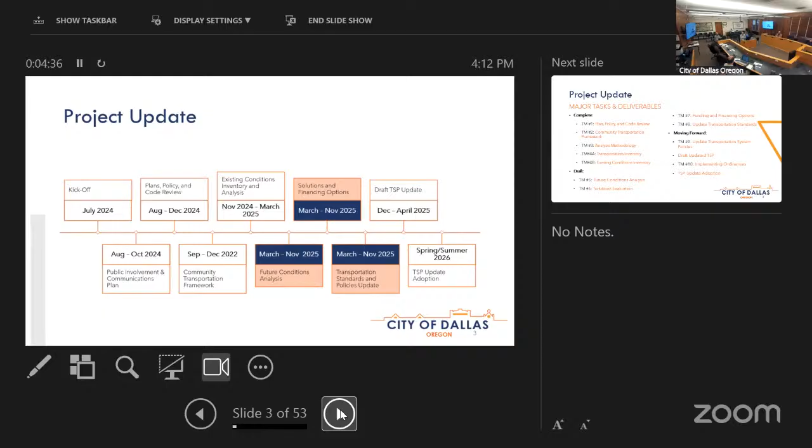Right in line with that, we have a series of technical memos. You guys have reviewed tech memos 1 through 4. Those memos, going backwards, looked at all the background documents, plans, policies, and development codes that inform how we do planning here in Dallas. We developed this community transportation framework, which is largely the goals and objectives of updating the TSP and also serves as a basis for developing policy in the future. We then developed a couple of different memos.

One on how we were going to approach evaluating existing and future conditions analysis, that's our analysis methodology memo. And then we went forward with our inventory of existing conditions. That was also when we had our last check-in, whenever we met with you guys last time, to talk about the inventory of existing conditions analysis.

We also had an open house right on the heels of that meeting and collected quite a bit of feedback, both online and in person, trying to fully understand what the gaps, deficiencies, and needs are in the existing conditions.

Looking ahead, what we have in draft format right now are a series of tech memos. The first of those is future conditions, and we move through all of the solutions and standards and things. The next memos will cover a lot of the policies that serve as a basis for how we implement the TSP in the future. Implementing ordinances largely gets to a lot of codes that get updated to the extent they need to be, and then the TSP itself.

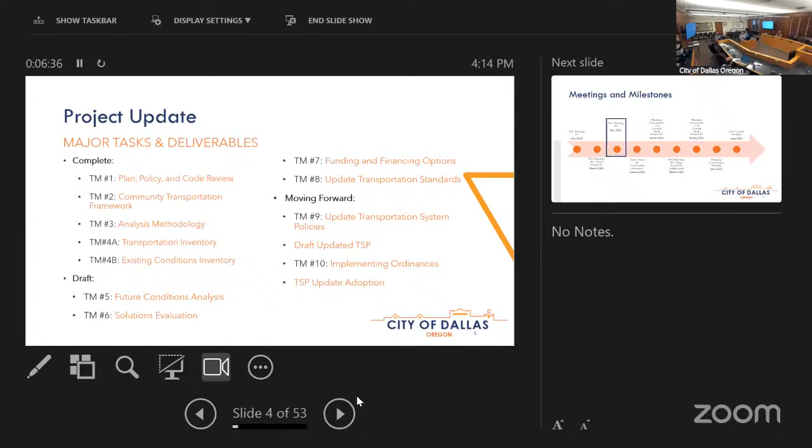For meetings, this makes it look like we haven't progressed very much, but as we get into 2026, we're envisioning our open house to be sometime in the early part of January, and on the heels of that we'll be meeting with the planning commission for one of our first work sessions, where we get into the weeds on some of the potential solutions and projects. We'll have our next PAC meeting number 4 sometime in March, with a projected date we're trying to stick to, which we'll share in the presentation. We'll have more work sessions, and by May and June we'll be going through the process.

So that is kind of a little bit of background, a little bit of what we've been doing, and a little bit on the schedule.

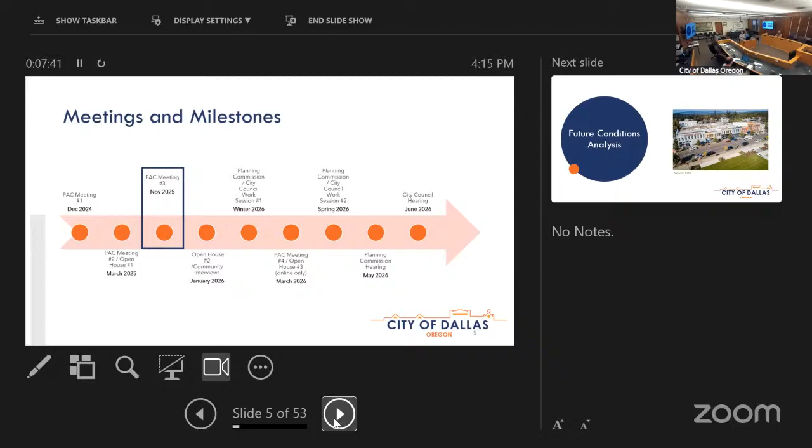So maybe real quick before I jump into our first major topic, which is future conditions, any quick questions on the background stuff?

Anybody online? Anything? No? All right, I'm gonna keep going.

For the future conditions analysis, as I alluded to, we start with our existing inventory and existing conditions analysis, and we look into the future to understand what the gaps, deficiencies, and needs are to really accommodate growth in the future. This mimics to a large extent our existing conditions analysis, looking at the same things like intersection operations, pedestrian and bicycle levels of traffic stress, and other measures that can determine what those future needs might be.

But we do start with this one, so just a quick overview of the memo. This memo is relatively short, but there's a lot of material there. The first thing we look at is population and employment forecasts, which forms the foundation for growth that we evaluate in the city. We look at different planned improvements identified at both the state and local level, and we get into the motor vehicle and non-automobile type analyses, again reflecting largely what we look at under existing conditions.

So the population forecast, the first step in jumping out to the future, is based on a variety of things. First and foremost is the Portland State University Population Research Center. They develop forecasts for all counties and the urban growth boundaries of incorporated cities throughout the state, and we are required to use that as a basis for all of our population forecasts. We use that to understand what that population forecast looks like.

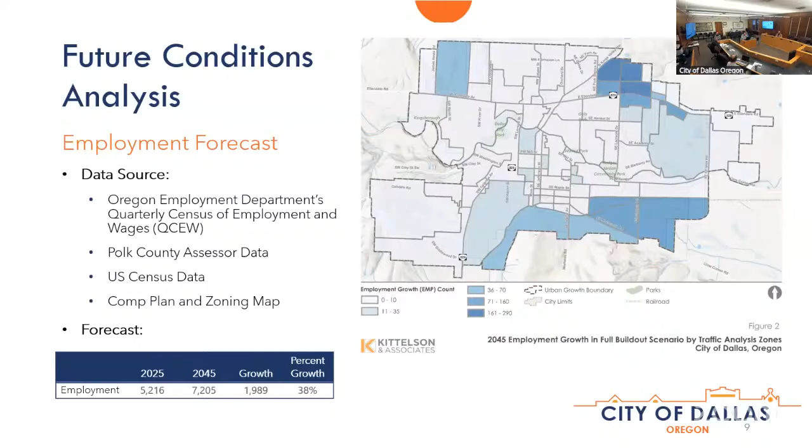Quick question -- on the population growth map, I'm noticing in the downtown core it looks like it's slated for 0 to 5 units. Am I reading those colors correctly? It looks like it is in that 0 to 5 range, yes.

Coupled with that, and this is something important to get feedback on, is if you are aware of an existing development application or a pending development that would influence how we'd start with that distribution, we can pinpoint where that's at -- that's the kind of feedback we would need to understand how we might reallocate that.

So something like that, like there's a 50 unit development going right here, that transportation analysis zone would get those 50 units, and the rest would be reduced proportionally.

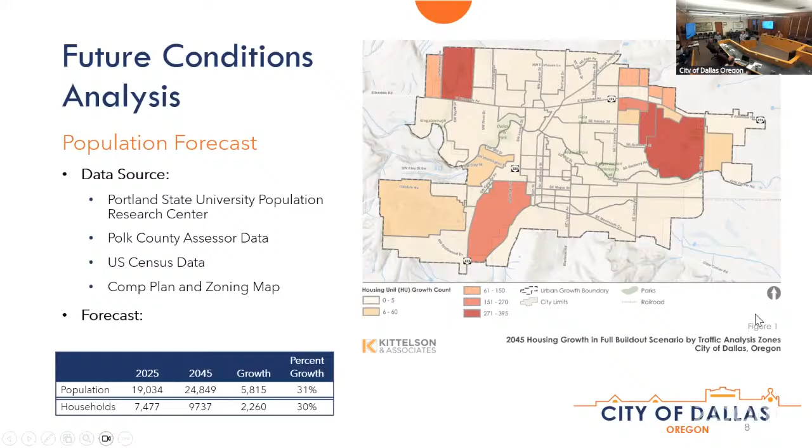So we take this population and employment information and roll it up into an analysis methodology that ODOT has coined as the enhanced zonal cumulative analysis method. It's essentially like creating a travel demand model for the city.

We take those transportation analysis zones that I mentioned, take the population and employment growth, plug it into a travel demand model, and it spits out what it expects volumes on the roadway system to look like. It does go through a calibration process, and if anybody wants to get into the appendix, there's a file that gets into that in some detail.

It's also subject to change pending some of the redistribution of population, employment, and input we've already received from ODOT. But essentially, this produces a map that highlights the anticipated traffic volumes on the corridors, how those volumes might change relative to where they are today, and we use that as a basis for evaluating intersection operations, segment operations, and things like that.

So shifting into the analysis itself, the first thing we look at is planned improvements. I mentioned this before, we look at both the statewide transportation improvement program, which is ODOT's rolling program for improvements in the state highway system, and Dallas's capital improvement plan.

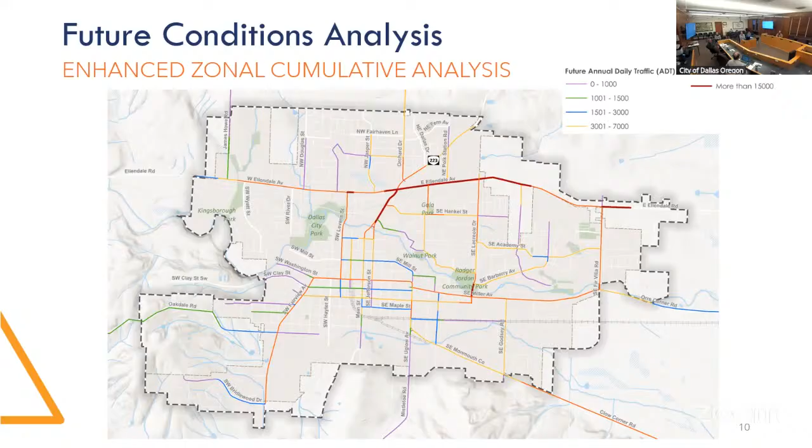Okay, good stuff. Mark, you had a lot to say on those plans. Anything you want to add to that?

Not particularly at this moment, just keeping in mind that tech memo number 5, the analysis tool we're using, feeds into some of the assumptions of the subsequent tech memos, so tech memos 6, 7, and 8. For instance, if the tool shows that you need an increase in capacity in a road segment, then you can justify going to a different typical cross section for that road segment.

You'll see later in the presentation there's actually a major arterial cross section that's in, I believe, the Dallas land use ordinance. It's described there, and there's a diagram of that cross section in tech memo number 8 that's 100 feet wide, and the road segments that typical cross section is assigned to in the TSP and the draft memos — that right of way currently stands at 60 feet, so you'd have to acquire another 67% right of way to get it to standard.

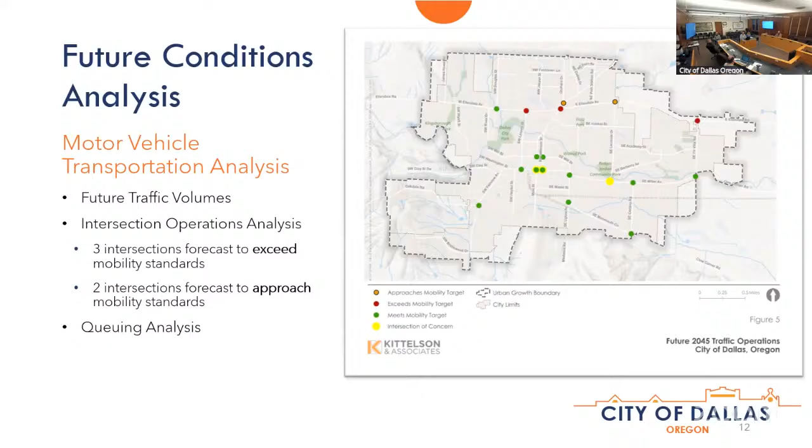And then we get started on more of the multimodal piece of this memo. This is a similar map to what you've seen before. As we looked at this, there's no current plans to update any of these Cherriots routes going through Dallas, but some of the discussions on that will be in memo 6.

So go ahead, do you have anything else to add?

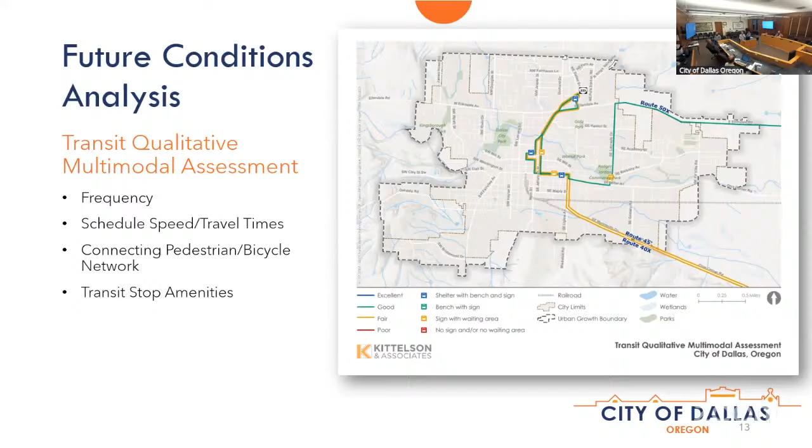The only thing I would add is that we heard from Cherriots during our last meeting and during the open house that while their current transit development plan doesn't include changes to the city's services, they would continue to reevaluate that as population and employment grows. So they could be looking at additional frequencies, additional services, and potentially something we heard from a lot of folks during the open house, interest in a little bit of a circuit, something that just kind of gets people around in Dallas proper. So while this analysis reflects what is basically on the books today, it could look very different in the future.

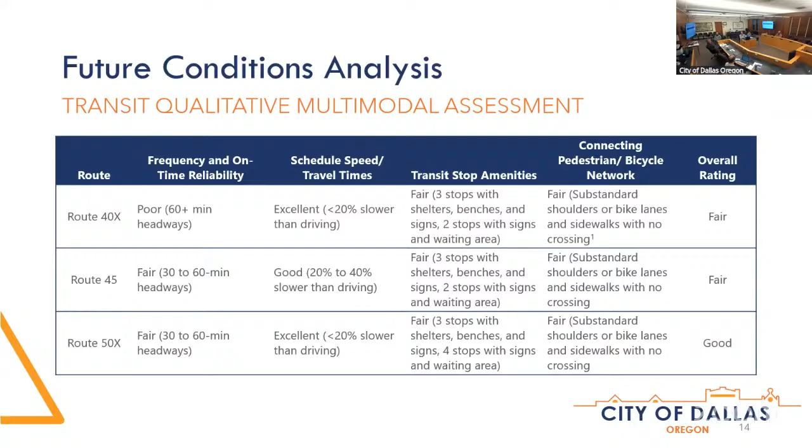Just wanted to acknowledge that. And then the next part of this, once again, we saw this in existing conditions, this pedestrian level traffic stress. As a reminder, PLTS 1 is going to be the lowest possible stress street you can find, and that's highly comfortable, easy to navigate for all ages. Often you'll see a lot of separation from the roadway. And then PLTS 4 will be the high stress environments that are very uncomfortable or sometimes even impossible to navigate.

And so a lot of those locations, if there's no sidewalks, it'll be a PLTS 4. The map will look a little bit different than last time because we did add trails to this map as well, since those are important connections to the city. We also ended up doing some analysis - all of these you're seeing are segment PLTS analyses, but we did add the intersection of Ellendale and Kings Valley because we found that, while mostly for the bike section, the PLTS was a little lower than we expected. There's some added challenges to navigating that actual intersection, so we did include that.

For this map, when we do PLTS, there isn't really a volume component, so when we talk about those, usually those pedestrians are going to be separated from the roadway. So this stays the same. Also, we do know there is the Dallas program to go through and maybe add some of these sidewalks, but since that's through the entire city, we didn't specifically update certain locations here to reflect that.

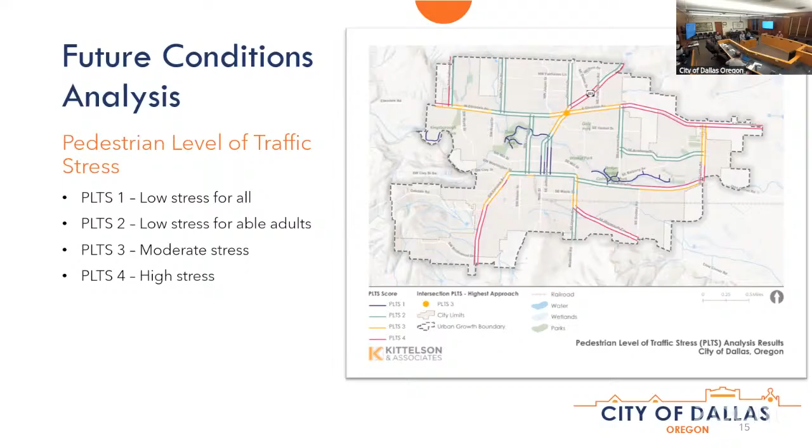We'd be happy to add that. It might be helpful because there's a bus connection on that facility, so it makes sense that we'd show that connection too. I'll keep that in mind for sure. Okay, LTS—oh, we skipped the LTS, let's go back one.

All good, so I wanted to go over this because we actually do have one or two changes on this one. The LTS is one of those analyses where the future volumes will affect the findings of bicycle and pedestrian stress levels. This is mostly because in shared facilities where bicyclists are riding with vehicles, if there are more vehicles, it's going to be more stressful for those bicyclists to ride. As a reminder, LTS 1 is very low stress—you might be able to ride this with a child.

And LTS 4 is very high stress, typically a shared facility with quite a few vehicles. The only location where we found it went above the threshold was James Howe Road, because it's currently shared, but it seems like in the future it'll be slated to have a facility on the west side. I also want to bring up that just because the analysis shows volumes going up doesn't change the LTS itself. In the memo we do note that it will still be slightly more stressful for a bicycle to ride those facilities, so it's important to note that.

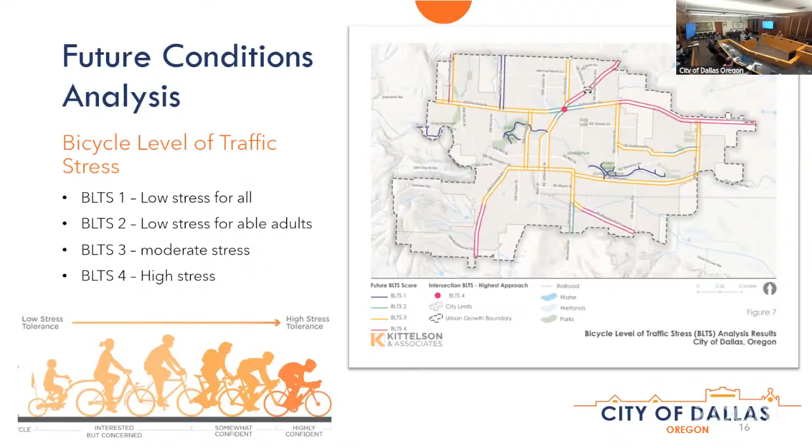Okay, go ahead to the next slide, unless there's any questions online.

As you're going through and looking through these memos - Matt did send forth a review of the memos and some questions in a memo - but in general, as you're looking through this, give us an idea of whether these current findings align with your understanding of the issues happening in Dallas when it comes to transportation, and if there are additional gaps and deficiencies or anything else we should be considering. A lot of these conversations about how we're showing the LTS are very important because it gives us an idea of how this analysis applies in your community.

We can't emphasize this enough: we look at a handful of intersections, we have a close look at as many roadways as we can, but other than that, we really rely on the agencies, advisory committees, and the public to guide us toward where the community feels the most critical issues are, both today and in the future. So as much feedback as we can get, the better the outcome.

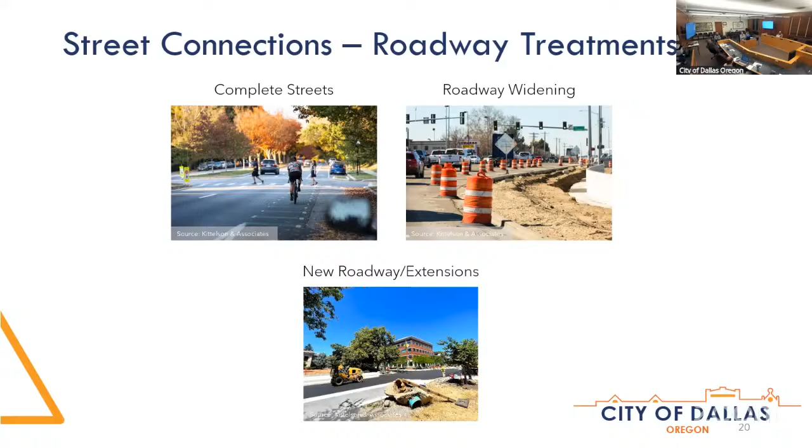A lot of these roadway extensions you have seen in the previous TSP. As you're looking in the memo, you'll see that we tried to flag all the issues that have been identified both in the previous TSP and through recent rounds of discussions about the street connections. But essentially they're all reflected here.

Maybe just a couple I'll highlight for you—I know I'm hoping they'll stand out a bit more on these screens. We have this connection here, a continuation of Fir Villa. It comes down, tries to stay within the UGB, and connects down here to Monmouth Cutoff Road.

One of the things we're seeing whenever we analyze this connection is it's starting to offload Miller, starting to offload Godsey, offloading Monmouth Cutoff a little bit, because if you're coming down here you're sort of zigzagging back and forth—similar if you're trying to do the same thing in the opposite direction. So we do see a fair amount of volume on this connection if and when we go through.

Some of the other ones, like LaCreole—as the LaCreole node develops, this one also becomes a fairly significant connection up through here, continuing LaCreole north of Ellendale and tying back into Kings Valley.

Another important one—there's been a lot of discussion on both this connection as well as what it looks like when you get to East Ellendale. This is the continuation of Barberry up to East Ellendale.

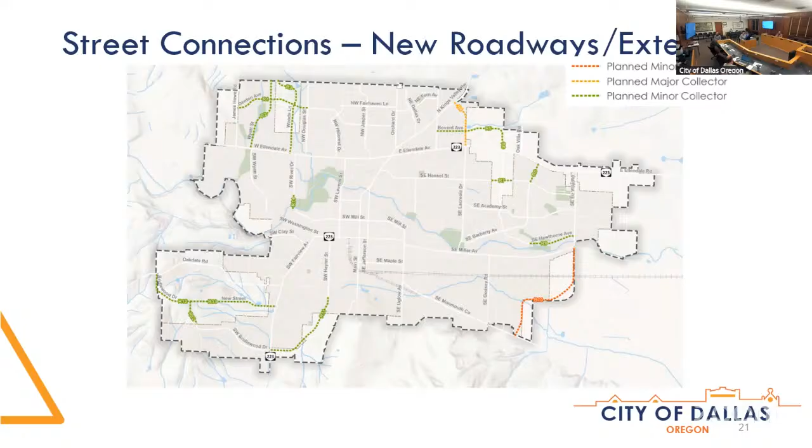So I'm going to continue on here to intersection treatment. Erica just talked about a number of the intersection operational issues we're anticipating under that 2045 timeframe. There's a lot on this slide and in the memo that gets into the weeds on these intersection treatments. There are a handful of intersections identified that are more or less carrying solutions that were identified in the current TSP, including some needs for signal upgrades, new traffic signals, and other intersection configuration changes.

There's also information in the Safe Routes to School Plan that talks about different upgrades to signals, things like the leading pedestrian interval, which is a way of getting pedestrians out ahead of the signal change, and a variety of other treatments.

The one I'll highlight quickly, and I'll leave the rest for you to review, is the Kings Valley and Ellendale Avenue intersection, which as Erica mentioned is problematic. We're exceeding the standard in the 2045 condition, and we don't know that we're going to be able to build our way out of that operation. We already have dual left turn lanes at the westbound approach, separate left turn lanes at every approach, and separate channelized right turn lanes. It's already a fairly significant intersection, and we also talked about how it's stressful for people walking and biking.

So we're not shying away from operational enhancements, but we're also looking at other ways to address it. One is the additional street connections we discussed a couple slides ago, extending LaCreole to the north and providing additional connectivity in that area, plus additional connections further west along River Drive and elsewhere. All that additional street connectivity serves to offload segments of east and west Ellendale, bringing traffic around or circumventing that area, and bringing down the traffic volumes entering that intersection. It's not going to solve all the problems, especially 20 years out, but it's one way to deal with operational issues.

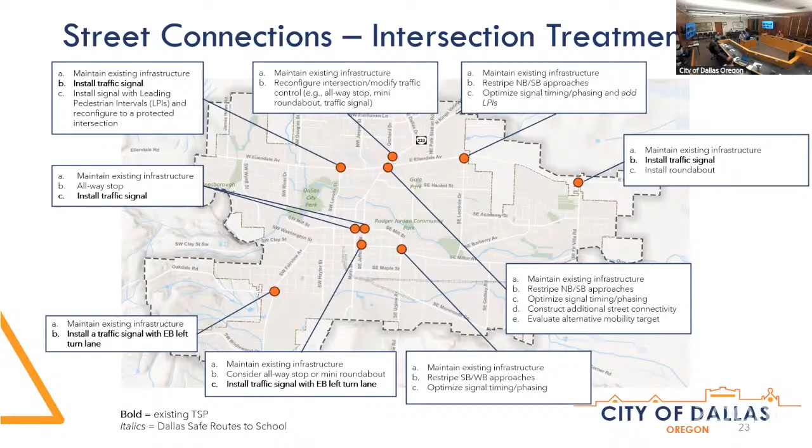All right, so we're going to jump into the pedestrian and bicycle systems. I might need to pick up the pace just a tad on some of this. We're a little bit more than halfway through the presentation, so but keep going here.

First off, I'll acknowledge that when you see this memo, you'll see that the ped and bike facility options are extensive. We did our best to consolidate these as much as we can, but there's a lot there. In some instances, it's done on a segment by segment basis, and we're looking at a broad range of treatments. Generally, what we're trying to do is either bring it up to some kind of a standard, a comfortable level of traffic stress, whether that's pedestrian or bicycle, or we're trying to provide some type of enhanced facility to accommodate a more broad range of different users.

So things like, even though curb tight sidewalks is here, Chase, it's an alternative that's out there, and curb tight sidewalks adjacent to parking, bikes, and things like that has a place. Sidewalks with planting strips is kind of the direction that a lot of folks are going. Other types of sidewalks with hardscape strips are more typical of a commercial or downtown type of an area. And then there's a variety of other things like crossings, paths, street furniture, and stuff like that.

So when you get to take a look at this, I just wanted to highlight what this kind of looks like. In this example, this is just a snapshot of what's on the pedestrian alternatives table. We break it down by roadway and then roadway segment. We talk about the different things that we're considering through here, what the type of existing facility is, what the speeds are, what the volumes are, different things like that.

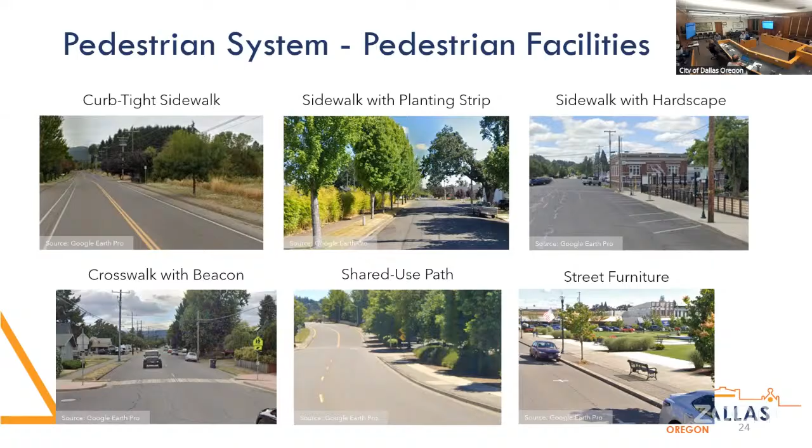If there's a particular treatment you really like, there's other ways of providing feedback. When we get in front of the public, we're probably going to be asking them to look at a different range of treatments, as well as the locations of those treatments, and this can pinpoint how those two things might work together.

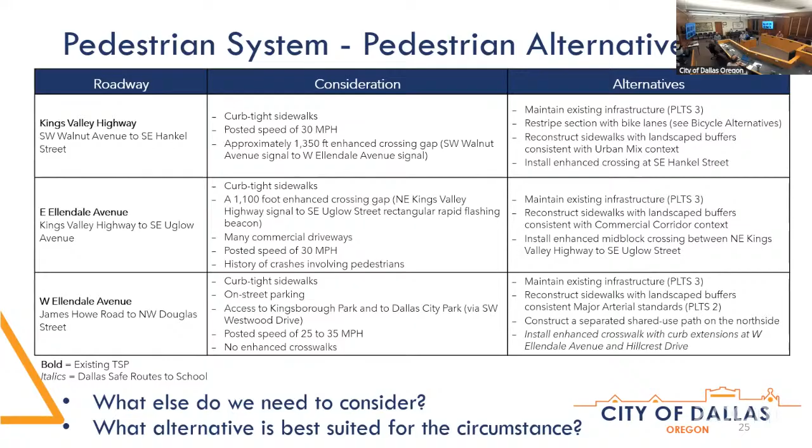Before I turn you loose on questions, the bike facilities we treated very similarly, with a broad range of different bike facilities, from a shared environment to a separated environment - bike lanes, buffered or designated bike lanes, and separated bike lanes, cycle tracks, things like that. I talked earlier about complex striping at the Ellendale Kings Valley intersection - this is a way of enhancing that by providing green paint through the middle. The last thing shown is wayfinding.

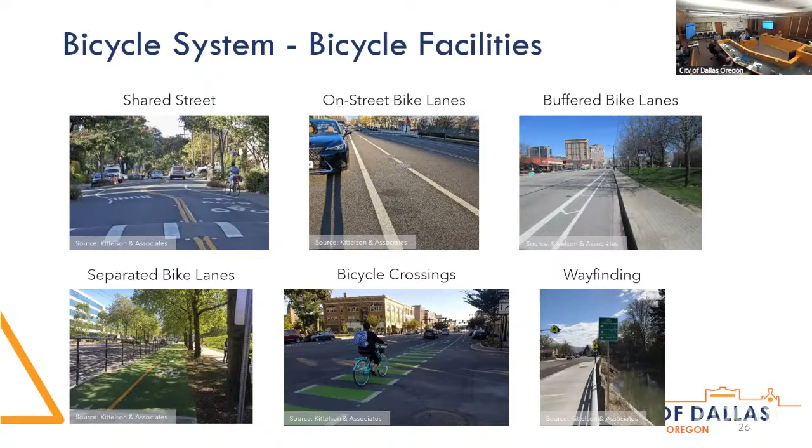For the bike alternatives, we take a very similar approach, segment by segment and consideration by consideration, to provide a broad range of alternatives. Anything shown in bold is consistent with the existing plan improvement, and anything in italics is a safe routes recommendation from the safe routes to school plan. We're trying to tie together existing planning efforts with all of our recommendations, so you'll see that all gets folded together into this list of alternatives.

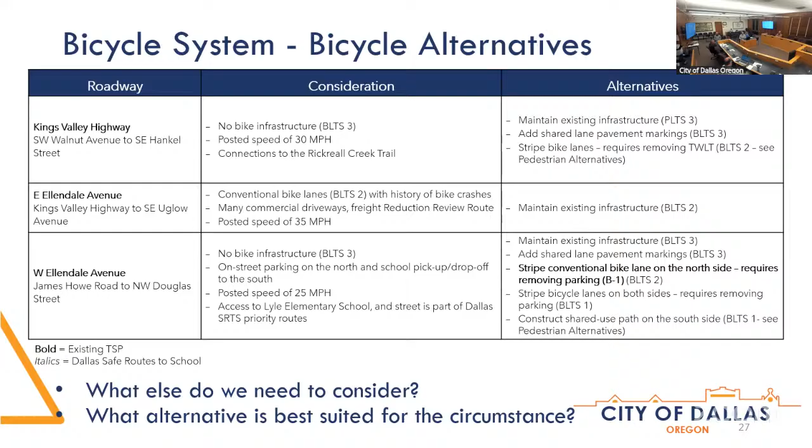I know that's a lot to process. Any questions? It doesn't have to be quick - any questions on that, and maybe even on how we might approach getting feedback on it, because these are lengthy sections for folks.

Ben, anybody online? Jolynn has her hand raised.

Hi, can you guys hear me okay? Go ahead, Jolynn. You might need to unmute your mic, we're not hearing you come through. Definitely not muted. Let me try. I can hear you, but I'm also on Zoom, so it might be the city's end. Oh okay, yeah, I can hear you as well. Okay, all right, we can hear you guys now. Can you hear us now? Okay, great, thanks.

I would recommend, in some of your examples of the complete streets, pedestrian facilities and bicycle facilities, including examples of how transit stops fit into those - especially with the memo considering your local circulator. Just get that out in front of people early on so that they're thinking about it. The earlier you can get that out in front of people, the better, so that it doesn't come as an afterthought.

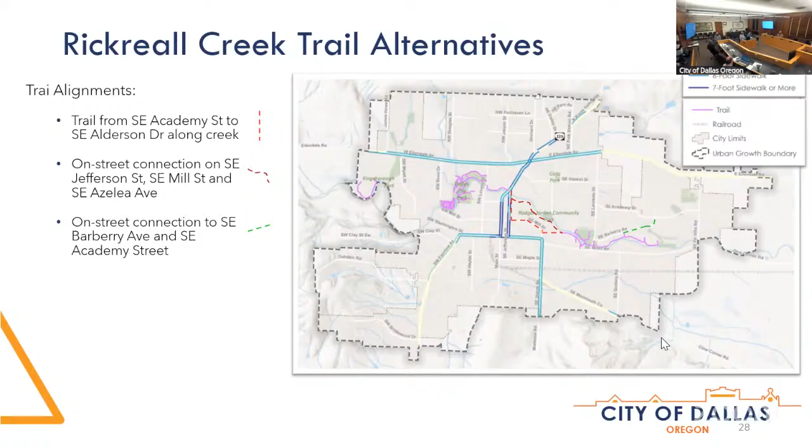So, public transportation alternatives. So we have a handful of things that we've highlighted here. Again, these are trying to present a broad range of potential alternatives. And I won't try to address exactly what Jolynn was asking for, but I understand what she's getting at. It would certainly be better to hear.

But for now, the range includes new and existing route changes. So again, we heard from a lot of folks during our open house and during some of our prior meetings that people are interested in some kind of a local circulator. People are interested in some potential modifications to existing routes and trying to extend that service to different parts of the city, as well as accommodating some of the future redevelopment of La Creole Node and elsewhere.

We also heard from folks that are interested in the service schedule and coverages. So again, working with Cherriots to increase the weekend bus service, transit stop improvements. So the city's got a handful of stops here and there. It kind of gets to one of the things that Jolynn was talking about, taking into consideration what type of facility, where the crossing is, what type of facilities are provided anywhere near the crossings, in different places where we're potentially enhancing those.

Park and ride locations, so getting some proposed locations on there, the Walmart parking lot, west of the hospital campus. And then I believe that's a church, House of His Presence... Yeah, that's right. Sorry, our transit counterpart is not with us today to cover some of this stuff.

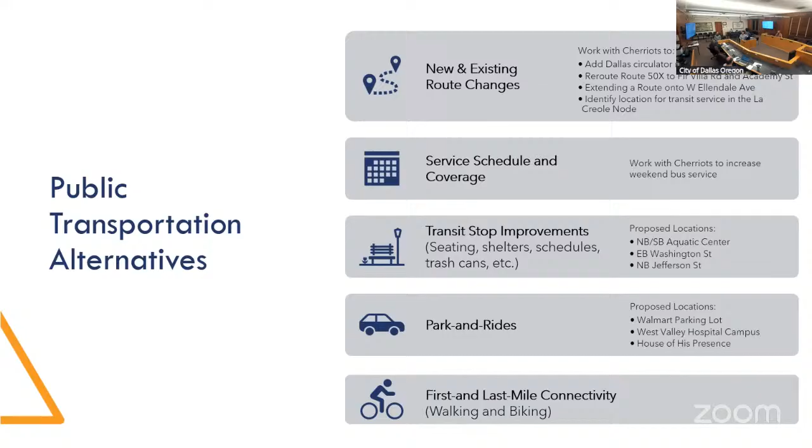I think this is the last one here, our rail system alternatives. So obviously Dallas has a rail line that comes into the mill site area down there towards the south. And what we're looking at here is a variety of ways that we could potentially be enhancing the existing rail crossings, the upgraded rail crossings.

So at some point in the future, if Fir Villa extends down to Monmouth, we really need to be thinking about that crossing there. The old adage, I don't know if this is still how people are thinking about it, was that if you bring in one new crossing, you have to close one or more existing crossings. But nevertheless, if we do extend further to the south, we're going to need to look at ways that can potentially enhance that crossing.

Other things that have come up on other similar projects when we're talking about enhancing rail systems is improving ADA compliance at pedestrian crossings at the rail line, also bicycle crossings at the rail line. Working with rail operators to reduce the speeds, potentially reducing the noise pollution and other things into the community. Working with ODOT Rail to consider emergency response. One of the things that we know is that a handful of the city's existing emergency response facilities are all on the north side of the rail line.

And if there's an emergency on the south side of the rail line, does that become a problem? And then the last thing is passenger rail service between Dallas and Salem. Is there a way that we can activate some type of service? A lot of this is contingent on conversations and coordination of plans and policies from others, not necessarily the city. So a lot of the time this is just our way of saying these are the things we're interested in, these are the things we'd like to try to improve upon.

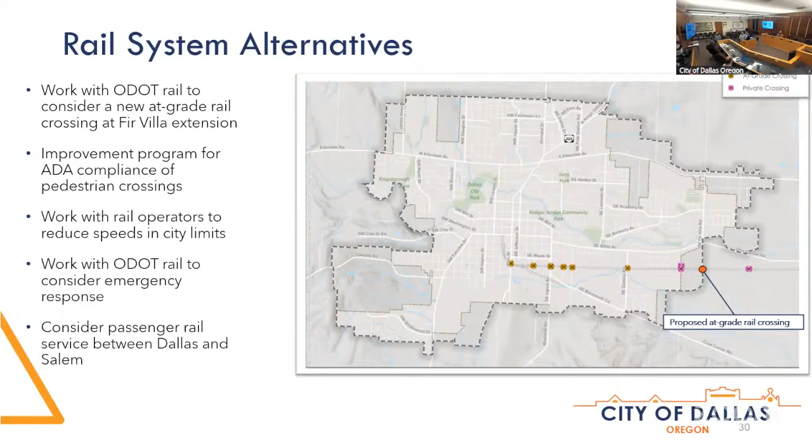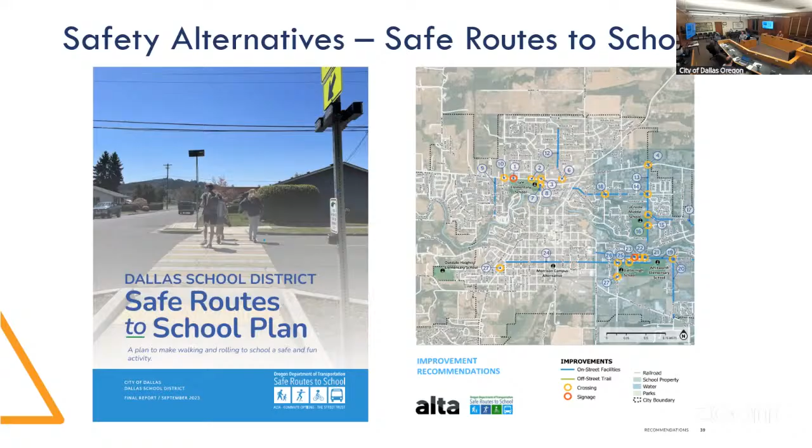We've also got a handful of safety alternatives that stemmed from the earlier safety issues. It's got a number of intersections that had a combination of high crash rates and a high proportion of specific crash types, plus a few segments that show similar characteristics. So we're really just trying to highlight different opportunities for addressing those, going through and identifying a variety of potential safety enhancements at these locations.

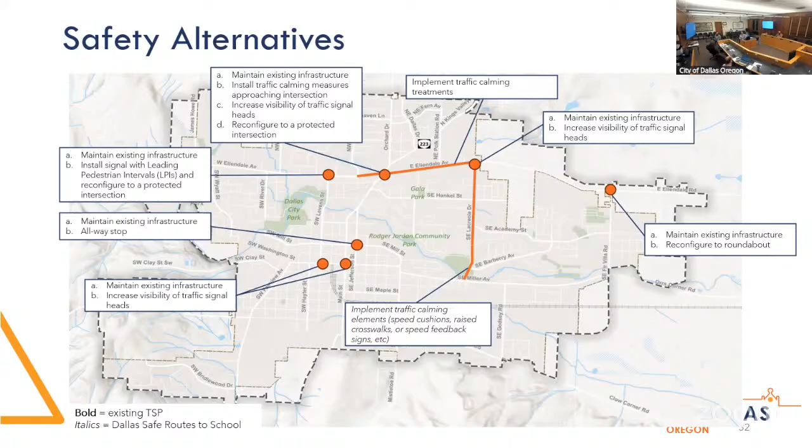I know I'm kind of zipping through the last few slides here, but this tech memo number 6 is in a very preliminary stage right now. We will be circulating this to you guys more formally soon, and we would like to get as much feedback as we can on this. This will be one of the main topics that we cover with our open house, so we want to make sure we get as much feedback as we can.

I'll pose this lightly right now, but for the sake of time we might want to keep things moving along. Generally what we're looking for with this memo is to make sure the alternatives reflect the appropriate range of solutions. Are there other things we should be considering? Are there specific alternatives that should be prioritized or de-emphasized? Any other project ideas, locations, or concerns? I just want to emphasize the draft nature of this memo, and make sure you guys realize we're still trying to make it very much a Dallas-oriented plan. Are there other locations, other treatments we should be considering?

I would be interested in seeing as an alternative option for the Kings Valley and Ellendale intersection, adding a traffic signal head for bicycles as a separate phase. You mentioned the conflict zone being like 270 feet long as you approach the intersection, so moving that curb side and then having a separate signal phase for the bikes could be a way to reduce that exposure, with minimal change to the rest of the intersection. Not that I don't like the idea of a protected intersection, but that's a bigger change.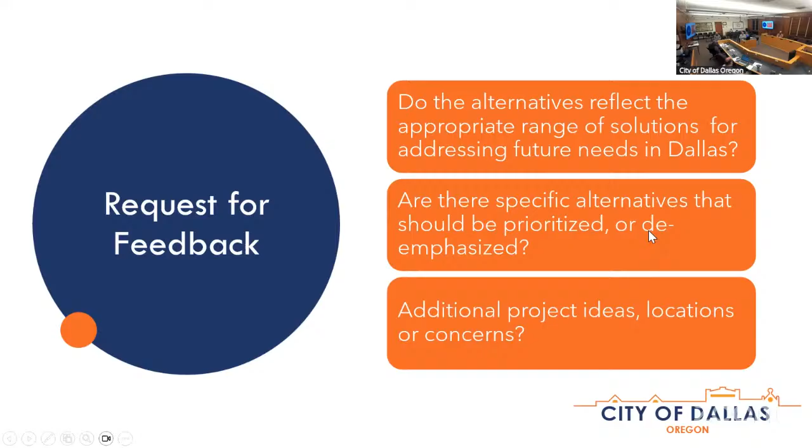Alright, I think I'm going to jump into transportation funding and finance. Okay, so tech memo number 7 is from finance. I guess I have that, should be.

So this is pretty short, unless any of you guys are financial wizards. We took a look at the existing revenues and existing expenditures and tried to project into the future to understand how much funding would be available to fund improvements identified in the TSP. Existing revenues cover a broad range of state and local funds, the state highway appropriations, which is essentially the gas tax, some federal reimbursements, system development charges, and a variety of other things like grants, interest, and urban funds. Expenditures are pretty typical stuff - you have personnel, maintenance and services, and capital outlay.

When you combine those two things together and project them out over a 20-year time frame, we do have a positive arc there, which is a good thing. I'll mention in the memo we look at a few different ways - three different scenarios. We look at a very conservative scenario and a not-so-conservative scenario. This one kind of fits in the middle, where all the funds continue to grow similarly, following historical trends on both the revenue and expenditure side. So the net increase over that 20-year horizon is about a $17.9 million number.

We're still going to be looking at refining that as we move forward. But that's essentially the dollar amount we feel we'll be able to work with by the end of the project. So a little less than $1 million a year could potentially be devoted to transportation improvements.

This does not include some of the capital outlay we referred to previously. So, cities, Chase jump in if I'm wrong, but the city's sidewalk improvement program, the safety equipment program, pavement rehabilitation, and a variety of other things fall into that capital outlay category. So $17.9 million is really what we're seeing as a potential opportunity for funding specific improvements in this space.

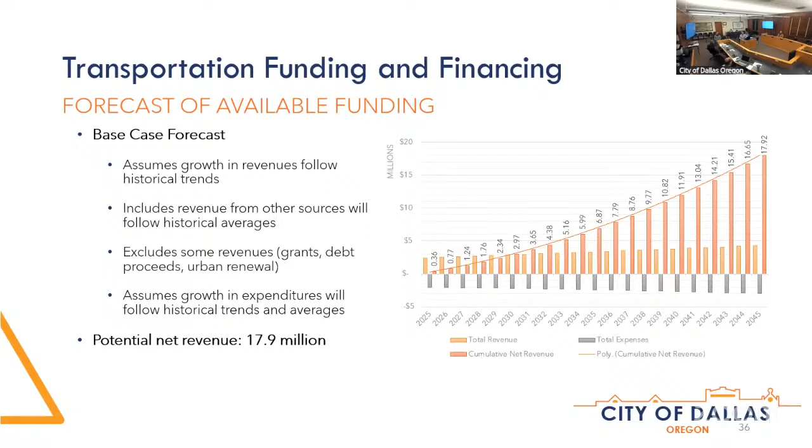So we have a potential local funding mechanism. Even if $17.9 million isn't enough to cover everything we identified, which likely won't be the case, we have a tendency to identify a lot of potential projects. There are a variety of things the city could do.

A couple things we looked at here: one, system development charges. Updating the SDC methodology and fee schedule — you guys are already updating on a regular basis, basing your fees on unit costs of projects, so that's a good thing. Another thing you can do is create modal-specific SDC categories. Some jurisdictions have a bicycle and pedestrian specific SDC in addition to other SDCs.

It could also be refining the trip generation rates and land use categories. Right now we have a broad range of potential categories.

As I'm looking at this urban renewal district, I'm realizing we did not update this subsequent to some of the feedback we got, so I'm afraid I'll have to disregard it. This is the one I think we took.

So, urban renewal — maybe I'll ask Chase or Charlie to jump in on this one — it's kind of run its course, is that right? Probably don't want to carry. No, it's just that one of the bullets says expand the boundary. There's a certain limitation on that because we're almost at our statutory limit as to how much of the city can be in the urban renewal district, so there's very limited ability to expand the district or establish new districts. The other ones, I think, are out — one or two more, the first one and the two middle ones are in question. Again, apologies, I meant to update that before we jumped into the presentation.

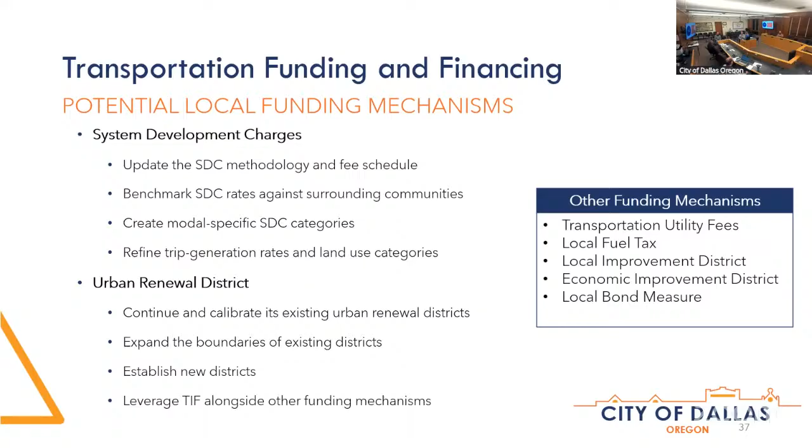Great, so this memo is relatively short. Again, love to get your feedback on that - any specific funding mechanisms you think some of the communities would be more receptive to? Would love to hear about that. Otherwise, concerns, feasibility, practicality, and community support for the funding mechanisms.

Are you aware of any other federal programs? I should mention the memo also includes an appendix with federal and state funding mechanisms. Just to highlight a couple real quick - one that's been gaining a lot of popularity is the Oregon Community Paths program, which funds pathways and off-street paths and trails. There's been a lot of planning, design, and construction of trail projects through this program. There are other state and federal programs that potentially fund similar projects. And then, are there additional local funding tools that the city should prioritize or explore further? We've given you a range, but let us know if there are other things.

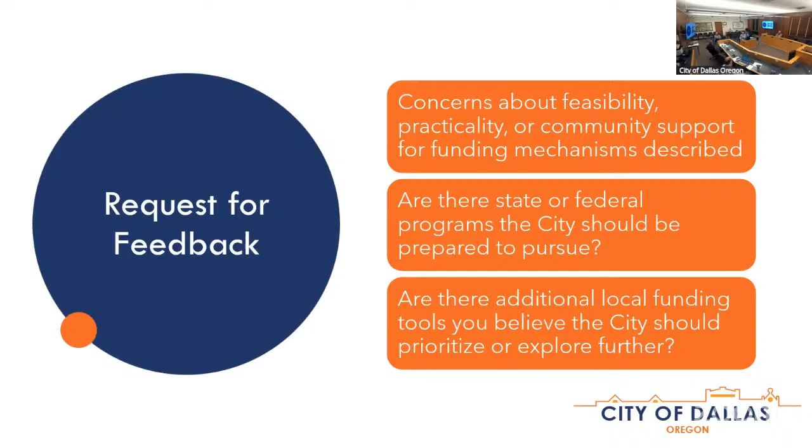All right, the last memo. So this one covers a lot of ground too. It's a little bit longer, definitely more oriented towards standards. We're not going to cover all this today in the presentation - just a couple of things I'll highlight quickly.

First one, access management standards - this is how many driveways, how many street connections are located along a given roadway, and how closely spaced they are. Access spacing has a fairly significant influence over traffic flow along the roadway. It impacts the safety and traffic stress of pedestrian and bicycle facilities. There's a lot that goes into access spacing and driveway spacing. So really all we're looking to do is expand how the city is currently looking at access spacing. Today it's really just focused on intersections, or maybe driveways, but we're looking at adding standards for both intersections and driveways, and spacing between intersections and driveways - expanding that a little to think about how those standards all work with one another.

We're also beefing up the variance process a little bit - so whenever a developer comes in and wants to put in a driveway that doesn't quite meet those standards, what's the process for meeting the standards? Similarly, a process for consolidation of driveways and access over time. And then last thing, addressing spacing on opposite sides of the road, making sure these are lining up appropriately or have appropriate separation. So you really have to like development code and standards in order to appreciate access management.

Yeah, that's a great point, Mark. One thing I'll mention is that when you get into this memo and start to look at the cross sections, we have a table, and below the table are many footnotes. One of those footnotes is that when you're on a freight route, a high priority transit route, or potentially an evacuation route, those things should all be factored into what your travel width is. Generally, we like to see a little bit wider travel lanes on any one of those routes.

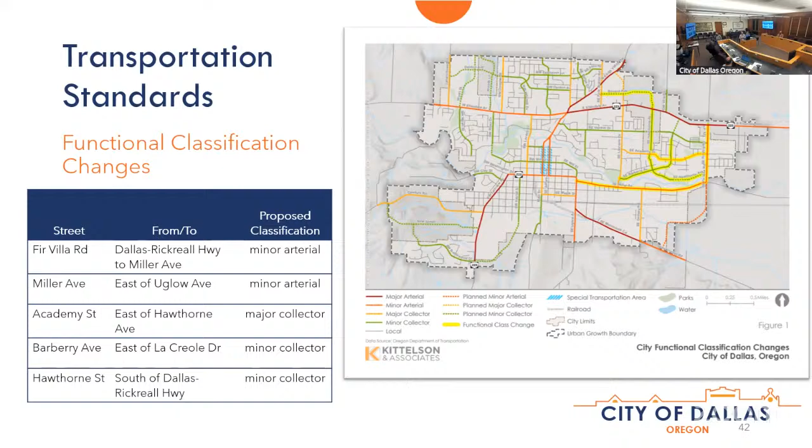So I'm definitely open to feedback on how we want to characterize that stuff, how we want to bring those to folks' attention as they're looking through this. Because the cross sections, we want them to both present a standard that the city can lean on, but also provide enough flexibility that developers and others aren't going to get away with everything, yet still enough flexibility that you can adapt segment to segment, street to street, based on the needs of that street.

So trying to accomplish a lot with each of these. Mark, I thought you were actually gonna talk about the 5-lane cross section. Well, I kind of covered that earlier, and in greater detail than this really merits, however.

And planning is by nature aspirational. Remember, we also have to ground ourselves in reality. That's very important to think about.

When you look at this map again, you see that we have Kings Valley, East Ellendale, Monmouth Cutoff, and Fairview as major arterials. So imagine a future where those have 5-lane cross sections, 100 feet of right of way to accommodate that traffic. So the city does have an alternative cross section for the major arterial that looks very much like the minor arterial.

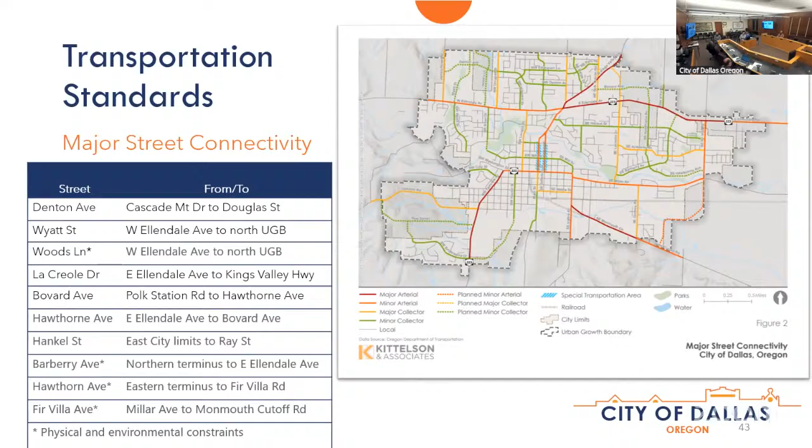Okay, and I guess there's a third local street cross section. It's one that doesn't have any on-street parking, relatively narrow, about a 20-foot travel way as well. It's just unfortunately not shown here right now.

So I don't know in this instance whether we're looking to identify one as the standard. Some jurisdictions distinguish within their functional classification, maybe a neighborhood route, or residential 1, 2, and 3, or some other variation. If we wanted to go there, we could, and continue having the flexibility to select the preferred local street cross section on a case-by-case basis, so there isn't necessarily a preferred, but sort of a range.

I think that's what we tried to get to in the memo, to show one cross section, and then within the tables show the range of potential alternatives. The challenge is we don't want to present like a 50 to 60-foot cross section. I think we might need to get into how to show one with a range.

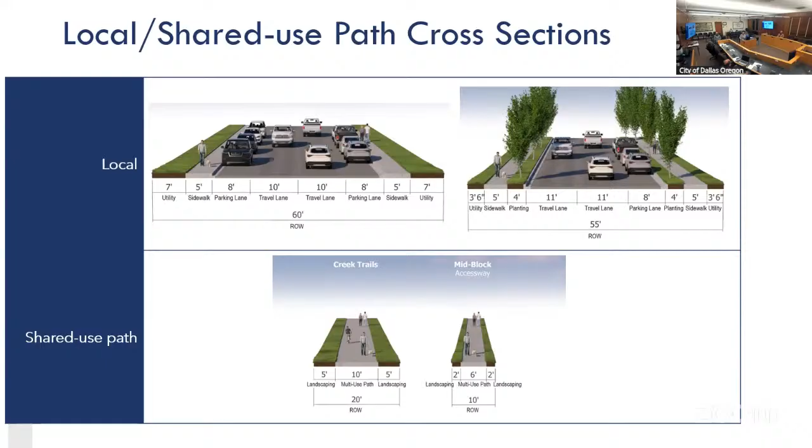All right, so this kind of falls into other elements, and we're kind of on the home stretch now, but we've been trying to cover quite a bit of ground here.

We've got local evacuation routes. The county has an evacuation plan. It more or less says we want to emphasize major facilities, designated local routes for evacuation, both primary evacuation routes and alternative evacuation routes. We took a stab at these, shared them with the county, got their preliminary feedback, and in general they were supportive, but I want to hear from folks again whether this feels right.

You look at the broad picture of Dallas, where it falls, what type of emergencies you might run into, what type of scenarios might result in evacuation. What do you think about which direction you're probably going to be headed? More than likely it's going to be to the north and to the east, so I'm trying to build on that and emphasize where those routes go. I really see this as something that lives in TSP, but maybe influences what type of cross sections, standards, lane widths, things like that get applied as you go forward.

Very similarly, freight routes. Mark mentioned this before, but that segment of East Ellendale, east of Kings Valley, is a reduction review route, which means it's on the MAC map — mobility advisory — and we'd like to take a close look at whatever changes we're recommending on one of these routes, particularly we don't want us to go any narrower. The rest of the routes shown there are local routes.

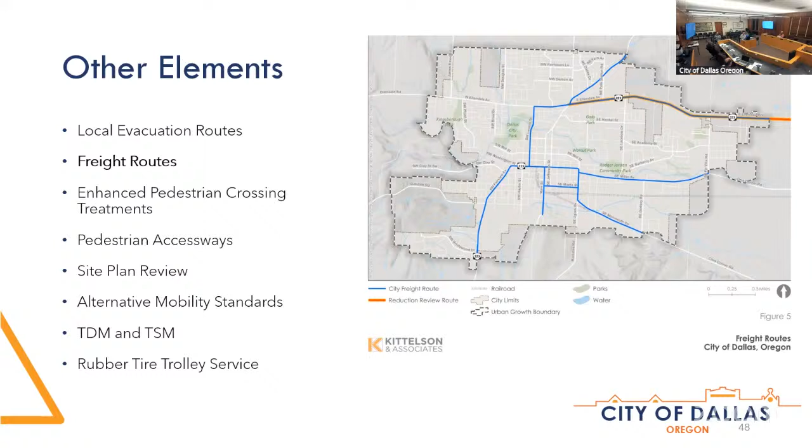It's more or less codified in the code about how freight enters and exits the city, so these are the routes that are reflected there. Again, really factors into how the street is designed.

Other things — I guess I'm jumping down to the bottom here. The last thing, the rubber tire trolley service. This was an idea that was floated, maybe to offer as an alternative to or in support of existing transit services, maybe in consideration of other local jurisdictions that have established these. I've seen some success in these. These are literally just our brainchildren, using markers and highlighting on the map where we think potential rubber tire trolley services are located.

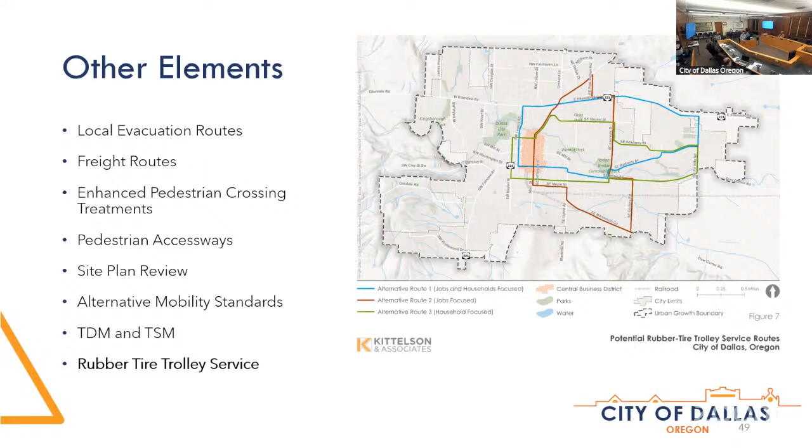The alternatives we've got here — one that sort of emphasizes jobs and households, one that's more focused on jobs, and one more focused on households. So trying to capture as much as we can. It tends to be focused on the east more than the west, but this is again just sort of an idea, and I think that's it.

The things that I left out — we do talk a fair amount about enhanced pedestrian crossings. One of the exercises we're hoping to do as part of the open house is present folks with a variety of different enhanced crossing treatments, provide them with a map, and ask them to pinpoint where they feel like these treatments are needed. Pedestrian access ways — this is really just how do we make sure that we're developing maybe a less than connected network, we're still providing some accessibility for pedestrians.

Things like site plan review, I think we identify a variety of ways the city can enhance their review of traffic impact studies and other things to try to reemphasize some of the goals, objectives, and policies presented here. And I kind of talked already about alternative mobility standards. TDM and TSM — transportation demand management, transportation system management — these are just ways of eking out a little bit more efficiency out of the existing system. So we tried to cover a lot of ground in this memo; some of it's more theoretical than others, but just different ideas.

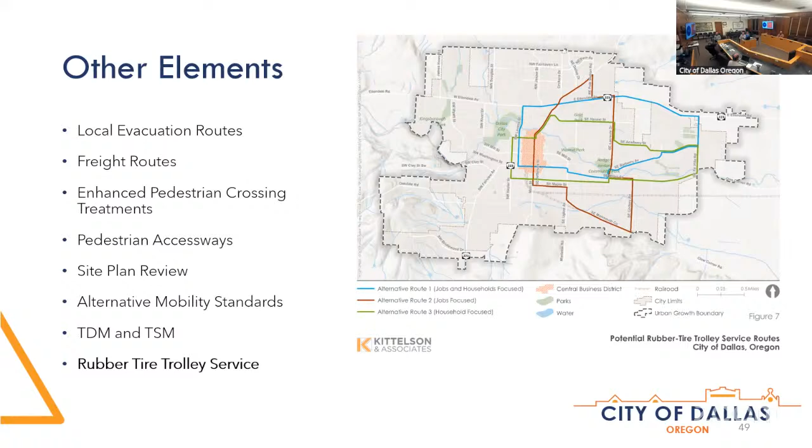Broad feedback we're looking for is do these standards and specifications align? This is probably the most important part of this memo. If I could focus your attention, really on roadway classifications and cross sections, I'd love to get your feedback on those things. Some of the freight route stuff we presented here, the evacuation routes, the freight routes - what are the real pinch points, the constraints, the things we should be considering? What can make the plan more Dallas focused?

And then street types, locations, context, where the city should adjust those cross sections. Any other considerations that should go into that kind of decision making. And then other standards or guidance areas you feel should be included.

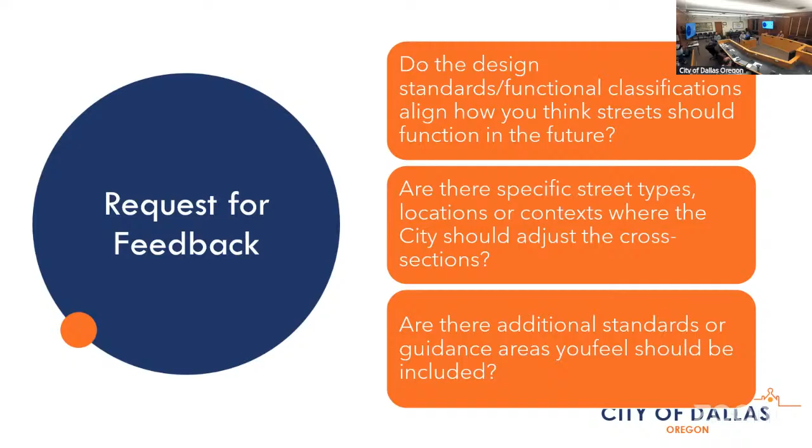I think that's it. I'll circle back and say we're looking for comments by Wednesday, December 3rd. That's just a couple of weeks from today. With that timeline, even though I don't want to extend it, it can extend if need be, because we're planning on having an open house in the early part of January. But I would love to get your feedback in advance so we can incorporate it into the materials put out for the public.

And then our next meeting, we're shooting for March 25th, 2026. Really what we'll be doing is revisiting some of what we talked about today and what we heard from open house number 2. We'll be presenting the last 2 tech memos.

I'm trying to visualize the timeline - do we have the TSP at that stage, or are we looking more at a high level at the TSP? More to come on that, but we'll be getting to it.

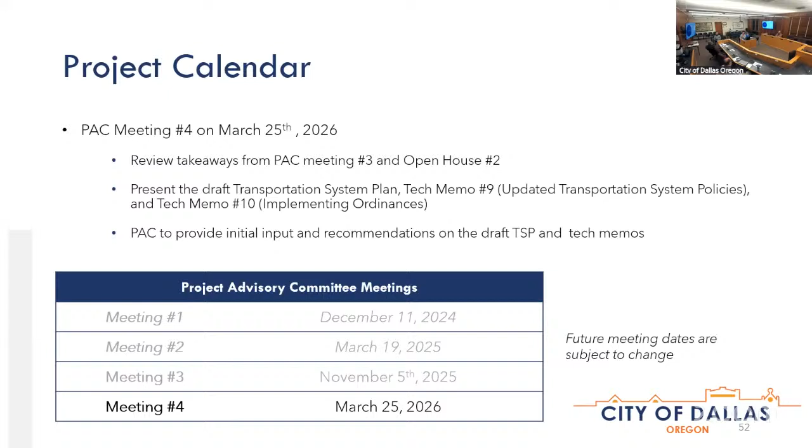And that's it. Yeah, one minute. Just a little bit of this. And then that PAC change. I know we just hit 6 o'clock. Any kind of closing thoughts, considerations? I know we didn't save a ton of time to chat.

Isn't all of this just going to be obsolete once the teleporters are deployed? Teleporters, flying cars - we'll find different jobs then. They'll need you even more. Yeah, possible. At least freight, right? Freight is still - I mean, how do you manage the conflict, because now you have a 3-dimensional space? Yeah, there are other big picture planning things like automated or autonomous vehicles, driverless vehicles.

Electrification - there's a broad range of transportation issues that could significantly influence infrastructure over the next few years. So one important piece of transportation that is not anywhere in this, because it's not actually in motion, is parking. I don't know if there's any language you want around parking, either for cars or bicycles, but that's in many ways an important component of transportation. People generally don't drive cars if there's no place to park them, and unfortunately bicycles, same thing.